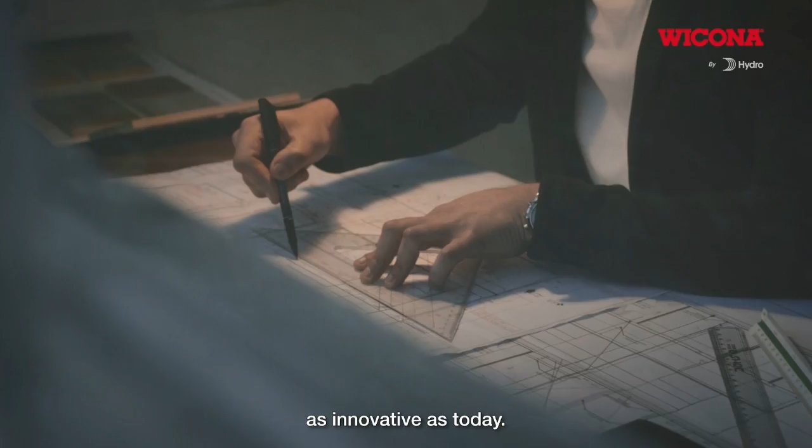Today, some of you will contribute to change the world. Outside, the world seems to stand still. Inside, it has never been as innovative as today. Rethinking for a better future, because the world of tomorrow has already started. By 2050, 70% of the world population is expected to be living in cities and urban areas, increasing energy consumption and carbon emissions from buildings. Our sector represents 39% of global energy-related carbon emissions, which is why investments in new buildings will have a huge impact on life quality and climate change.

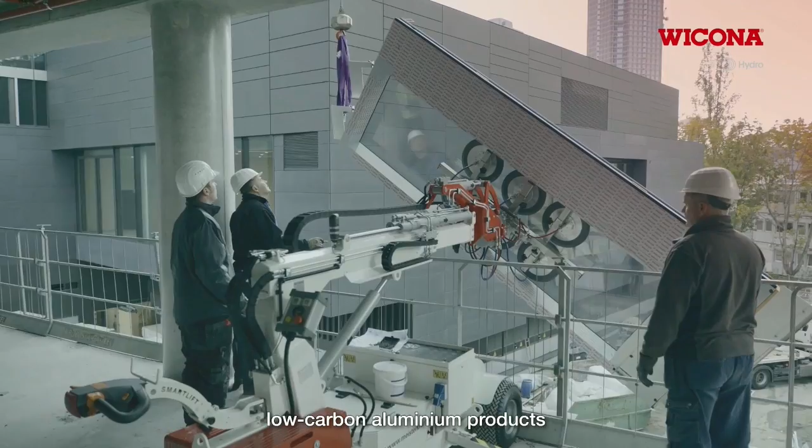Drawing on our 70 years of experience, we are now developing circular aluminum products, which are helping reduce carbon emissions in the user phase. But we feel we need to go beyond. When looking at the life cycle of a building, you will find that the upfront emissions represent 1/3 of overall CO2 emissions. Our aim is to reduce our CO2 emissions by half by 2025. To achieve this goal, we are going beyond recycled low-carbon aluminum products and running every part of our business as sustainably as possible. It begins with the origin of the metal.

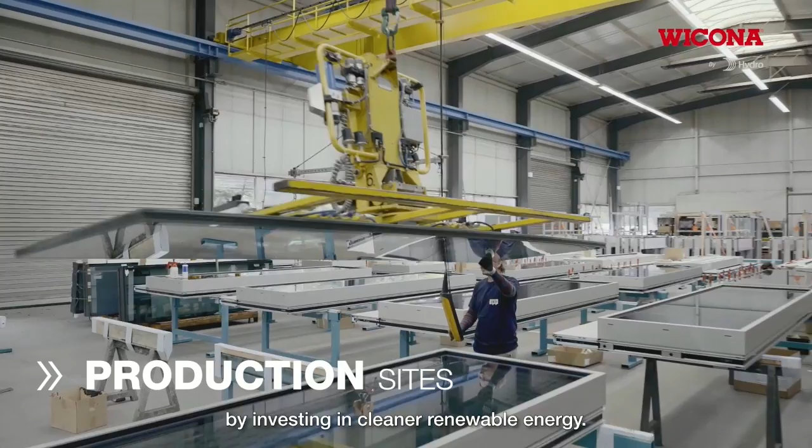We use Hydro CIRCAL aluminum, which has among the lowest carbon emissions in the world. We also go beyond aluminum by working with suppliers of recycled components who share the same values. We are continuously reducing and optimizing energy consumption at our production sites by investing in cleaner, renewable energy. And we're using less packaging materials and delivering in better ways. In the end, it all starts with us. Sustainability flows through every decision we make, every action we take. But let's see the broader picture. We are going beyond ourselves to make a bigger difference. As a part of Hydro, we commit to empower 500,000 people with education by the end of 2030. We are all in this together. We know we can make a difference because we care about building a better future.

Beyond tomorrow. Hydro is pioneering sustainability approach. In the heart of sustainability is our innovation and technology. I kindly asked Joris to tell us a little bit about our strategy and our going forward. Please.

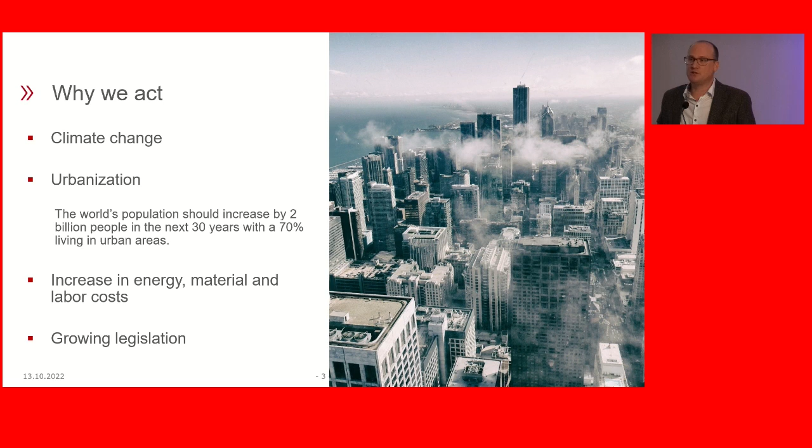And of course, we still have people that say, okay, it's not really my problem. I'm not so worried at the moment. Let me just do what I do best. But guys, we have to be honest. It's not something that is voluntary anymore. We are now in a situation where also governments are really imposing new regulations, new legislations moving forward. So it will not be a choice, it will really be part of our daily life in the coming years.

So as a good example, we see now from the European Green Deal that the first legislations have been set up on an international scale, but also on a national scale. So you see that some countries are already going faster than others in Europe. And we are really seeing that legislation will drive the future way that we have to do our construction. So we want to stay on top of that. We want to stay ahead of that to be ready for the construction of the future.

Especially because 39% of all energy-related emissions are related to buildings. So if you look at all the actions that we can take as a society, 39% of that is linked to buildings, which means, of course, it's an easy target. Buildings will really be a focus point for all the legislation. When you are talking about new buildings, there will be more severe regulations.

When you talk about renovation, we know that there will be a huge amount of renovation to be done because we still see countries where we are still using single glass or where we are using systems which are really not performing. So in the coming decade, let's say, we will see a huge shift driven by legislation to move to more performing solutions.

Luckily, we see in our business that more and more partners in the construction world are aware of this trend, about this evolution. So we are now talking to big developers, to big contracting companies, to big architect firms, in order to investigate, to analyze, to understand where we can make the biggest efforts in order to reduce the impact of buildings. And that's really a very interesting journey that we started already several years ago. But it will be part of our life in the future. It will be part of your life in the future.

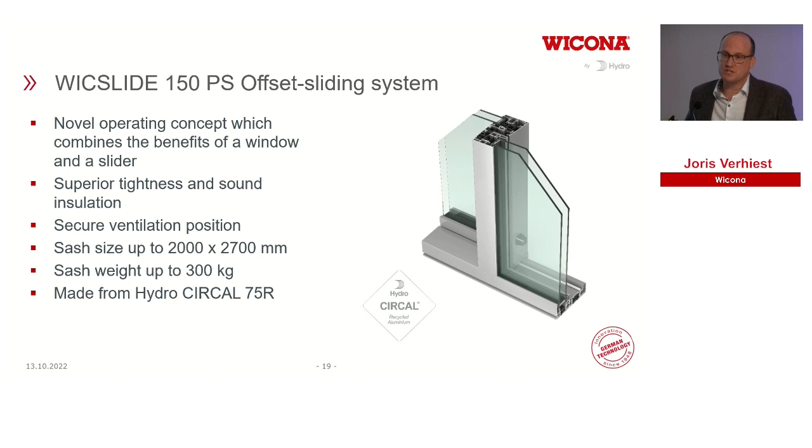Good. Then a third trend that we see in the world, and that's really a more complex trend, is everything related to energy control of a building. And then you are talking about how to handle ventilation, because we want to keep the building envelope closed, but at the same time you need natural ventilation for the people living and working inside the buildings.

You are talking about solar shading. We are doing a lot of research on what is the best solar shading solution for each type of building. But it's a really complex mix, and you see that in the building envelope, these combinations between ventilation, solar shading, building automation, and night cooling principles are getting more and more complex. But we are making solutions for that.

And one solution that is really getting a prominent position is what we call modular construction. I was talking in the introduction about the fact that the material cost is going up, the labor cost is going up. It means that the traditional way of making buildings is getting more and more difficult, because we go more and more to an industrialized, modular type of fabrication. And that's where you get concepts like unitized facades more and more.

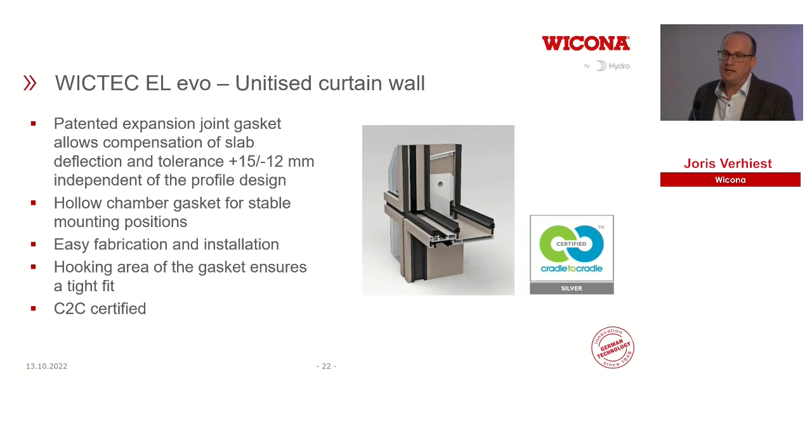Unitized facades are really about the full building envelope of any type of building, which can be adapted in functionality, but also in material choice, where we can keep the core of the building. For instance, after 40 years, we can take out the envelope of the building, keep the core, but put an entirely new envelope around it, which gives the building owner the opportunity to decide which type of building do I want.

Do I transform my building from office to residential, or from residential to another type of application, or you can even change story by story. So modular concepts in the future will offer a lot of flexibility without each time having to demolish buildings entirely.

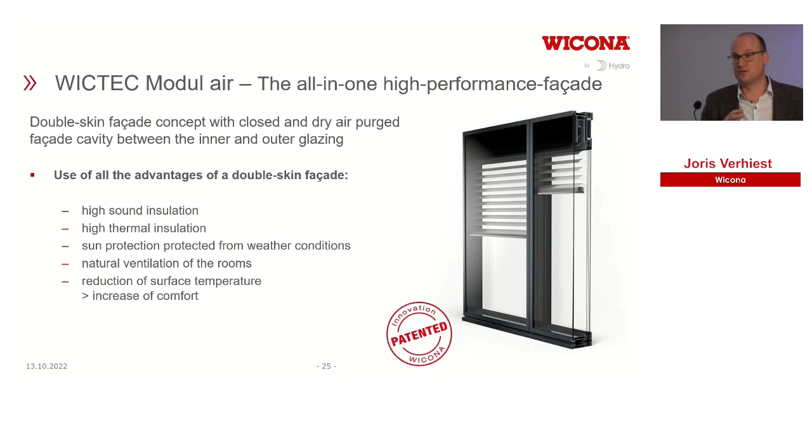So the conclusion, or let's say the first conclusion for me, is that all of us in the construction world, we are going to more and more complex design of buildings, but sustainability is really getting a more prominent place when we have to make choices in which type of applications we will take.

Why is this even more important? Because what we have seen till now is that the systems are getting more and more performing, the systems are getting more and more adapted to the future needs to reduce the use stage of a building. But the second step is that we are actually looking now at upfront emissions.

And what do I mean with upfront emissions? Then we have to have a look again at the life cycle of a building. We are talking about the construction process, because in a lot of cases at the moment, we are not considering the upfront emissions in the decisions for our buildings.

When you are working on a project, do you really know where the materials are coming from? Do you really know if the systems, the materials you are using, are really good? Are they not hazardous? Are they really able to be recycled? There's a lot of lack of knowledge there. And that's where we really need to focus on as a full building industry, because in the future we will have to make choices from a sustainability perspective to know which are really the materials of the future.

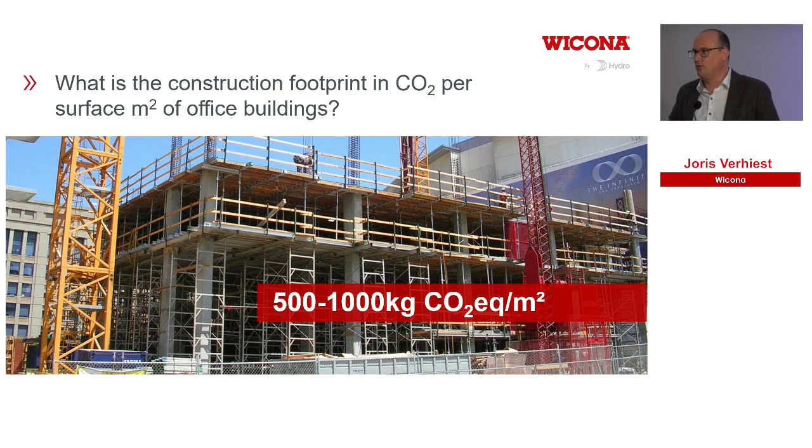So if we have a look at a typical window, and we look at the weight of a window, of course, it's clear that the biggest weight is related to the glass. The glass in a window is the heaviest component. But now we have to think differently. We have to start thinking in life cycle assessment. We have to start thinking in environmental impact of materials.

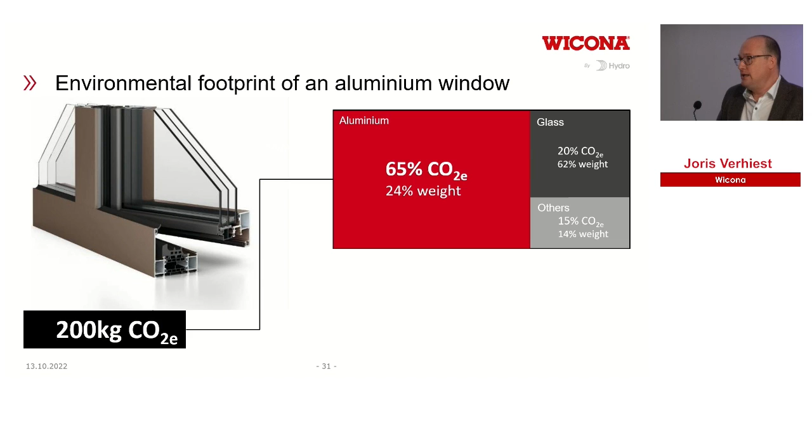And then you will see for an aluminium window that the impact from an environmental perspective on global warming potential of the aluminium is 65% for a standard average window in aluminium that we are selling in Europe. So this has quite a big impact, the aluminium.

What we also have to start thinking and reflecting about is what do we do with this window after 40 years? And we need to consider these types of calculations also in the future, because I will come back to that. For instance, aluminium compared to PVC or wood or any other material has a very big advantage that you can recycle it infinitely without quality loss. So in the future, when we are making choices for a material on a construction, we need to make the right choices. And that's the type of exercises you will also do more and more in the future.

So the big question is, where are we with the aluminium? And this is really something you need to be aware of, because depending on where the aluminium has been produced, the footprint of the aluminium can be very negative or can be very positive. For instance, we see that still a lot of aluminium is being produced from alumina with a lot of energy in countries like China, the US, Australia, and so on, using coal, which is very polluting from an emission perspective. We also see still a lot of gas being used, mainly in the Middle East.

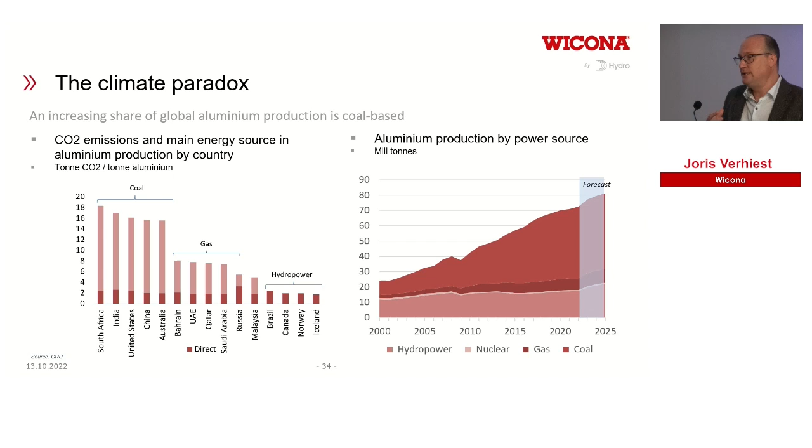But we also see that there are new technologies nowadays which are really focusing on renewable energy in order to make aluminium and to reduce the footprint. So in the future, it is really important when we have debates that we understand where our aluminium is coming from. But not only the aluminium, we need to know about all materials. Are they really hazardous for the environment or not? So that's where Wicona has been a pioneer.

We have really created a kind of revolution. I'm very proud about this revolution, because 4 years ago, all of a sudden, we decided strategically to change all of the aluminium that we are using in Wicona from a standard primary alloy to an alloy called Reduxa, based on renewable energy, actually based on hydropower.

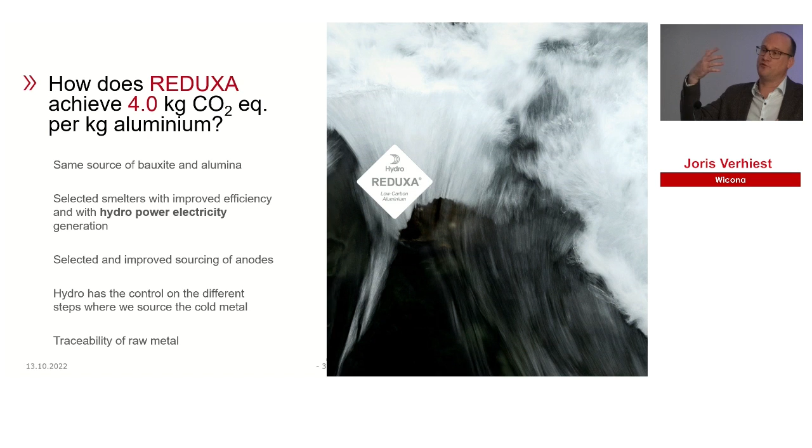So 4 years ago, we really took all of the primary aluminium out, and we only started using renewable-based aluminium alloys, which meant that in the Wicona offer, we reduced our footprint on the aluminium part by almost half. But this was only the beginning, and that's really the revolution, and we are really ahead of our market, I must say. Because nowadays, in the Wicona world, we are using another alloy which is called Hydro CIRCAL 75R.

That's also where we in the aluminium world are convinced that aluminium for windows, doors, facades, sliders will remain a material of the future, because we know that there is a huge amount of aluminium still available. We know that recycling aluminium is very interesting from an energy perspective. You only need 5% of the energy compared to primary aluminium. And we also know that altogether in the construction world we can go to very high recycling rates.

Because if you are looking at beverage cans, for instance, in some countries more than 90% is recycled. In the car industry, we also see huge recycling rates. We are convinced in the construction world we will go to very high recycling rates.

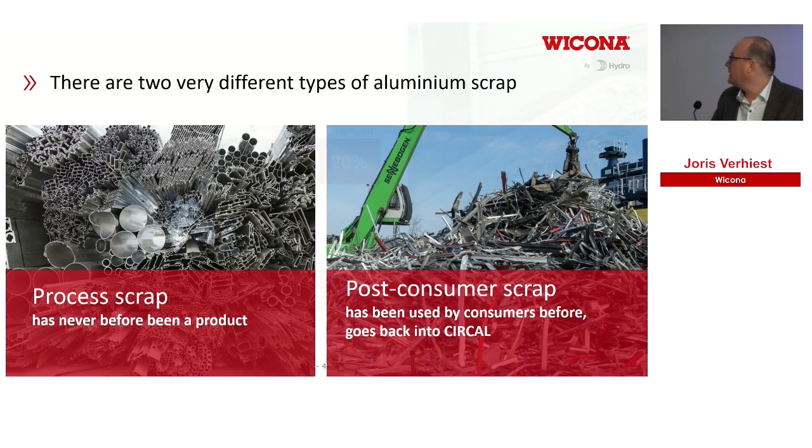What is also important to understand is the difference between post-consumer and process scrap. We are actually using post-consumer scrap, which means that we are really using windows that have already been used in our products. We are not talking about process scrap. Process scrap is something you get automatically from the extrusion process. We are really taking back old windows, old doors, old sliders, and recycling them into what we are currently selling. So quite an interesting process, which we have in-house in the Hydro facilities.

We are now doing this type of recycling in several plants across Europe, and now we also moved into the US. We are quite a specialist within the Hydro Group on everything about alloys, and we have been doing thorough testing, so we know that if we recycle in our processes, we can give you the same quality as a primary alloy. There is no degradation of quality. That's very important to understand. Simply because aluminium is a beautiful material, you can recycle it 100 times without any quality loss. And this we know how to do quite well in our facilities.

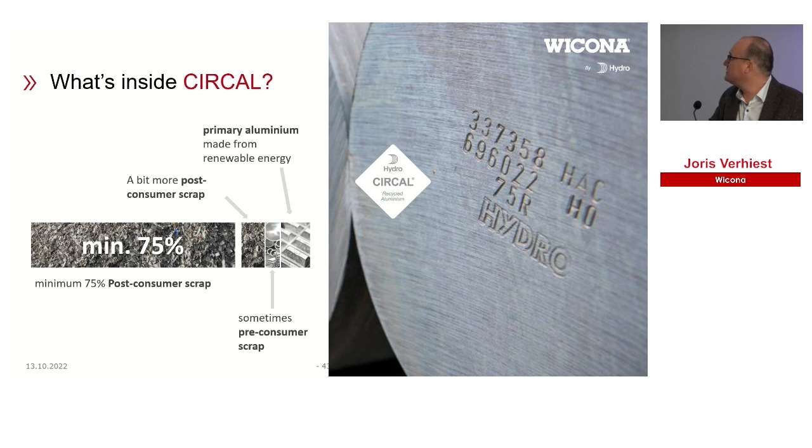So what does this bring us? This is probably one of the most important slides of my presentation. With the current offer of Wicona, we are offering CIRCAL alloys, which means we have a footprint of 2.3 kilos of CO2 equivalent for 1 kilogram of aluminium, whereas on average in Europe we are still at 8.6. So that's quite a big revolution, and that's unique in the offer, and we are very proud of that.

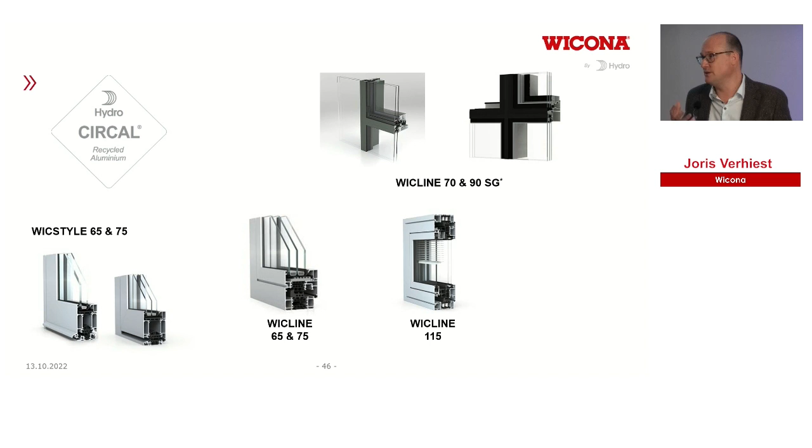In the last years, since we started implementing the CIRCAL alloy, I think we have already covered more than 300 projects worldwide. We went one step further. We also decided everything which we have in our warehouses is now offered in CIRCAL alloys. So whether it's one bar, one window, or one project, all of these materials are produced using CIRCAL. So at this moment, if you are working with a Wicona product, you know that from an environmental product perspective, from a global warming perspective, you are really using the most sustainable aluminium solution currently available in the market.

So, what is the second topic? It's actually not only aluminium. If you look at this cross-section of one of our window systems, you see that the synthetic material elements are also very important. Because we are continuously increasing our thermal performance, our systems are getting bigger, the synthetic part is getting bigger, and there too we have really made a revolution, because we started using recycled polyamides.

We are taking back scrap from the car industry, recycling it, and using it in our future windows. So not only is the aluminium giving us a lower footprint, the synthetic components are too. And then we have to go a step further, because this is something new.

This is the new Wictec EL60 facade. What we have done, quite revolutionary, is look at the full facade, and we are now looking at all components: aluminium, synthetic materials, corner cleats based on Zamak, screws based on stainless steel, and so on. All of these components we have transferred to using recycled content. At this moment, this facade is based on 75% recycled content.

We are using CIRCAL old windows for the aluminium. We are using rPET, which are plastic bottles, for the thermal insulation. We are really trying to move everything to recycled content. We are not waiting 40 years to recycle. We already use it now, which means we reduce the footprint now.

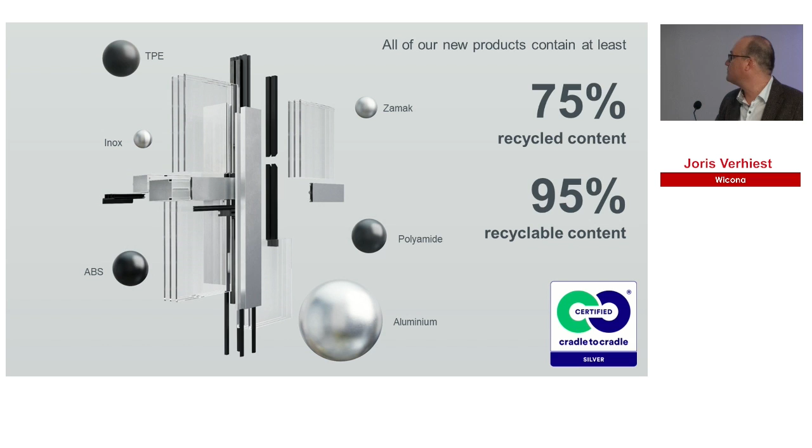In order to make everything quantifiable and measurable, we have also been working very hard on our Wictop software. In the Wictop software nowadays, we are able to generate EPD documents. For some of you, EPDs, environmental product declarations, may be something new, but this is something you will be asked for more and more in the future.

With an EPD, we actually show the footprint, the environmental impact of a certain product, by analyzing its full life cycle. Which means that in the future, when talking about a building, certain choices will have to be made between materials, and we will have to make these choices based on facts, because you will need to monitor and show the reality of the footprint of a certain material in order to make the right choices.

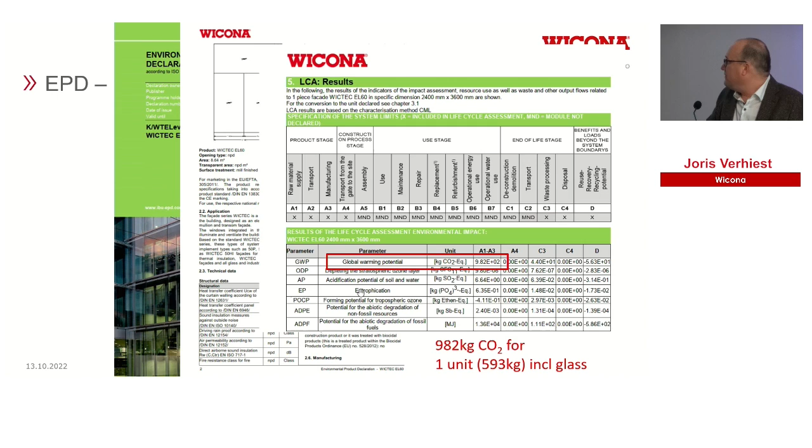So we are quite future-proof; it's done with an independent institute. Everything is checked, and we can now show you the effects of our materials in our projects.

But secondly, we are changing from primary materials into recycled aluminium, recycled PET, or other recycled materials, which means we are reducing the footprint of our systems both in material and footprint. In a simple explanation: if we compare a primary facade made somewhere in Asia, for instance based on coal, to one made based on recycled content, we are reducing the footprint of a facade by a factor of 10. That's really huge, and that's the type of exercise we will have to do more and more, altogether.

So there's a lot of greenwashing going on. What we try to do is use independent audits and independent certification to prove what we are saying, that it's really not greenwashing but facts. We have a lot of official documents to back that up.

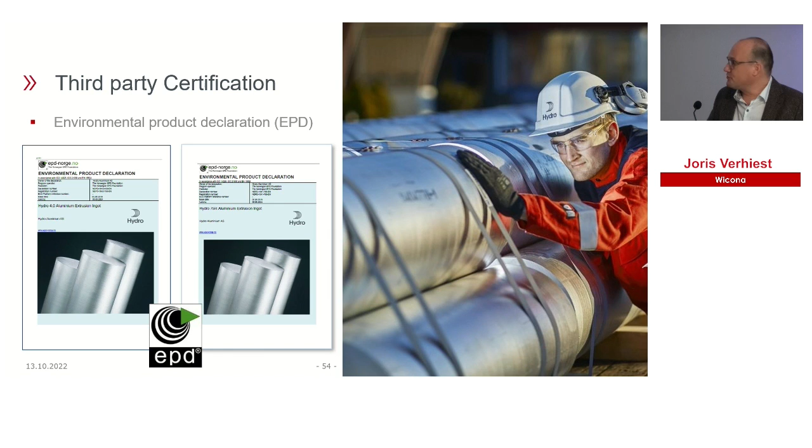We are working a lot on certification, also for cradle to cradle, because we also need to help support green building rating schemes. We are also part of ASI sourcing. What does this mean? Probably you know FSC wood, which is the wood alternative. We want to be certain that the aluminium getting into our system is produced in a corporate, social, and governance-responsible way, with respect for people and wildlife. That's what we do with ASI certification.

So quite a complete picture. And that's actually what I wanted to talk about, the first pillar, which is the products. We talked about a lot of topics, so I will quickly move to the next pillar, because what I've been talking about this morning till now is really what we are bringing to our products, what we are bringing to you as a product, what we are bringing to the construction world from a product perspective.

I've been talking about performance levels, about use stage performance increases, about the first phases, the material choice. All of this brings a benefit to the product. But secondly, and that's the new dimension we need to talk about, we also need to think about how we, as Hydro, as Wicona, can reduce our footprint. Everything we can do as a company to reduce the footprint has an impact, directly or indirectly, on the footprint of the product. That's another challenge, because there too we need to think differently about how we operate our daily businesses. There's a lot of elements here in the company pillar.

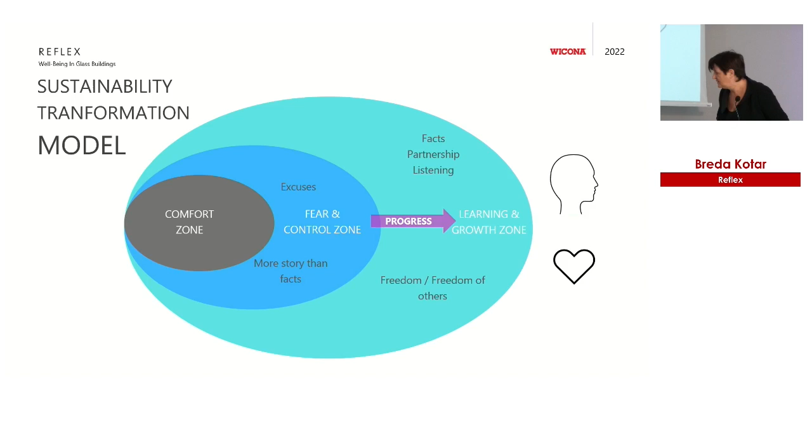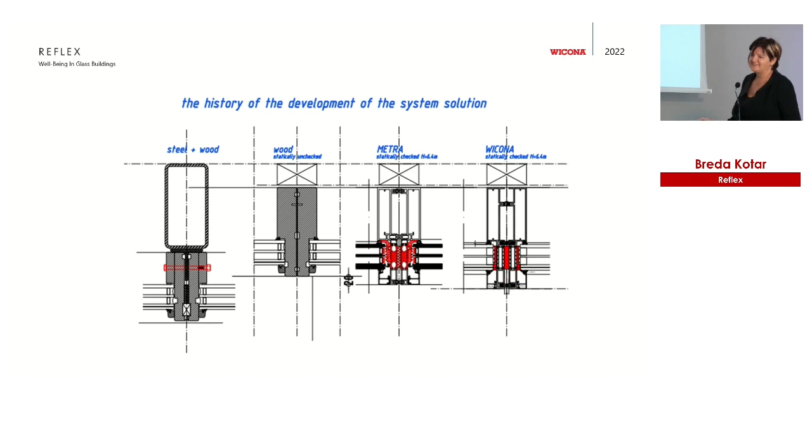And the product Hydro 75 was chosen. 75 is going back to the process. And so we studied this process from Wicona about the sustainability, about how to bring the material and the waste again into the process and to make an excellent product.

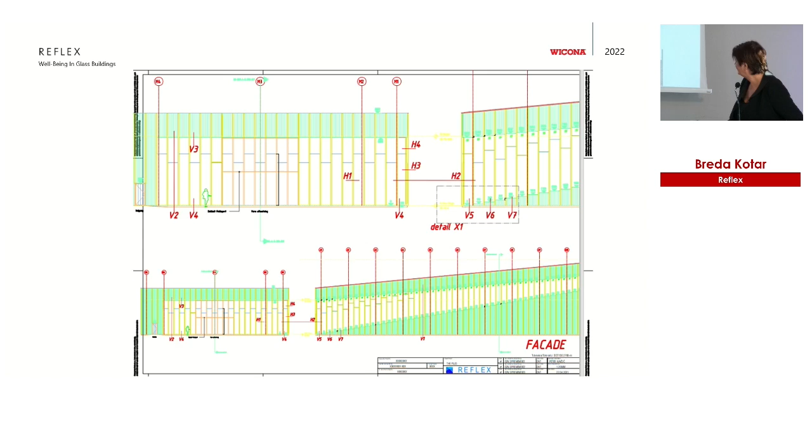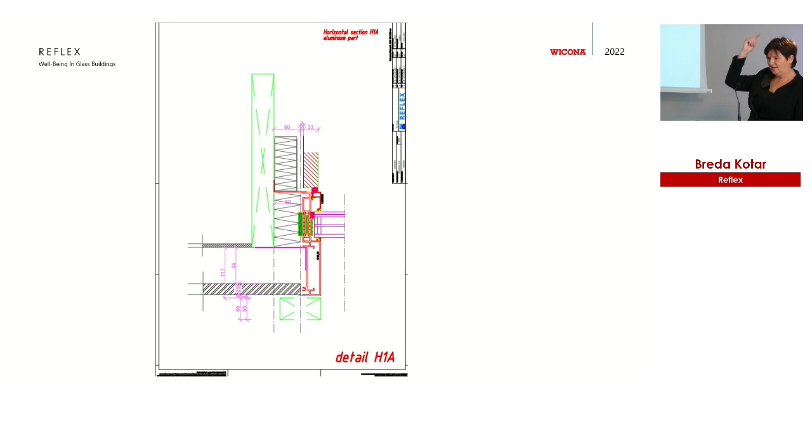This is how we addressed the anchoring in the wood, which was another topic. Here are the facades; each glass which left the company was a different one. This was a challenge for the production as well. And then we put additional beams into the vertical of the building. What was still interesting is that the architects decided in this rounded building not to use any vertical supports. We needed to bring everything up on the horizontal part of the circle.

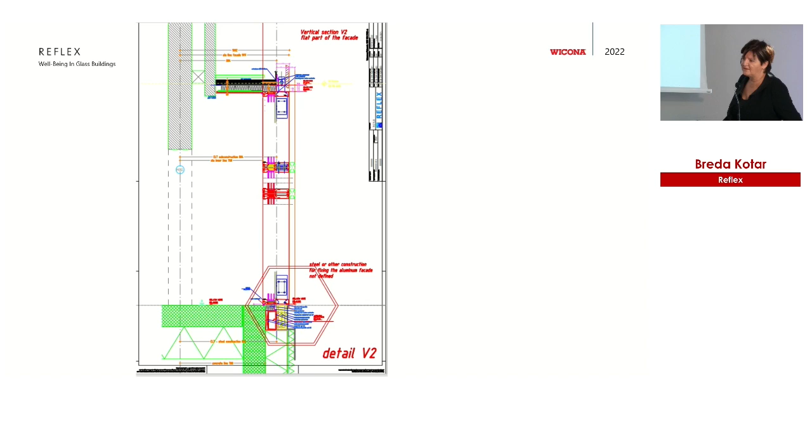I have so many details here, I will not bore you with them unless some question appears, but our engineers really studied this for 3 months, day and night. The WICONA team from Croatia was very, very supportive. Without them we couldn't do this, but our engineer, Mr. Petar Kaučić, is really an expert at bringing impossible wishes into possible ones, achievable in production. So here is also this sectional anchoring. So I will skip this and go to the pictures.

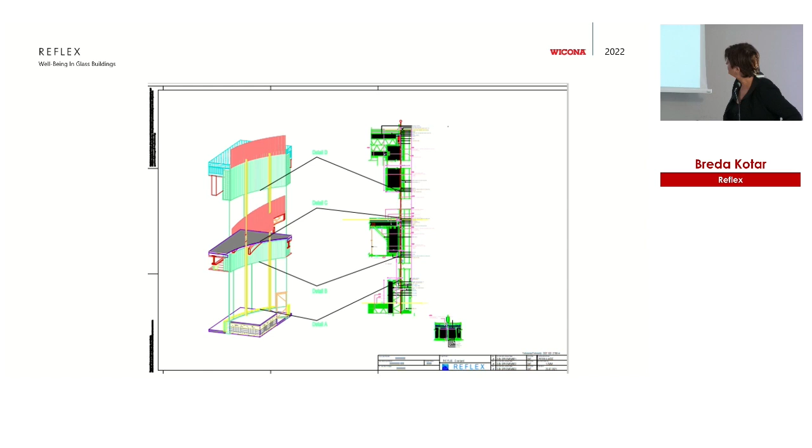And the question is, what is inside? Inside is the production of furniture, on 7,000 square meters, and on the top they have photovoltaics. The building really achieved BREEAM Excellent, and they were awarded in London with an architecture award. As well, another building: we have two buildings in this competition. One is this in Croatia, and another one is that one from BIG architects.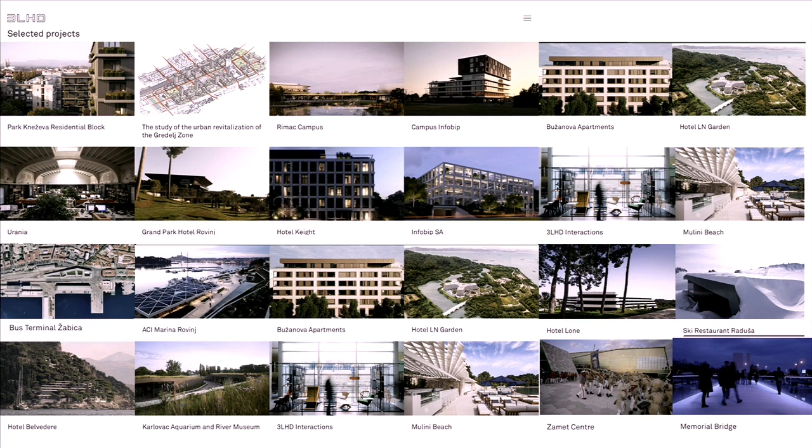What is important also to say, during these 28 years, we did a lot of projects, over 350, mainly in Croatia, but some of them also abroad. All the projects are different typologies. We did everything, actually, in any typology. Nuclear power plant, as Zoran said, and churches, yes, we didn't do a church. In the last 15 or 18 years we had a lot of projects in hospitality, which everybody says is logical because you are from Croatia. Croatia is a tourist country.

Those projects were different. As Ranka already mentioned, we are kind of an integrative office, iterative office, because we involve a lot of people. We are a collaborative office. The people are developing through our knowledge, which is based on projects of different kinds. And our knowledge, we are gaining it through working, building, designing the ideas. Those are some projects. I'm not going to go into them, but just for you to see some of them. This one, for example, is prefabricated.

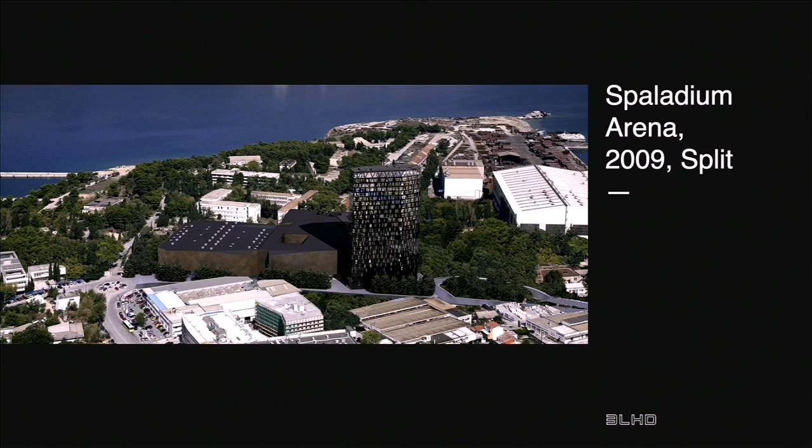Because we are in Split, I have to mention also Riva. This was a very interesting public project, Split's living room, done now 15 years ago, where we redesigned the whole elements and facilities there with the landscape, urban design, lighting, and so on. We also did in Split part of the Spaladium Center complex. We did the Spaladium Arena, which was done for the World Championship in handball.

Those years were interesting because there was so much of the hotel industry or hospitality. We did a lot of public projects. We did a lot of sports halls, from small to big, or I would call them civic halls, because most of the project is a sports hall, but it is also a community center. This was actually our first project.

Maybe it's a prophecy, but we did a hotel first and then came back 10 years later. Hotel Lone was the project which actually moved us to hospitality. It was the first project of that kind. It was part of Design Hotels. It's not a brand, it's a chain, now part of Marriott. It's in the beautiful city of Rovinj, and we have to praise our client, with whom we have been together for almost 15 years, because they believe in us. This was a very important project for us, and it led us to some other projects.

When I see the year 2013, it's always a long term for architecture. This was a project where we won the competition in Zurich, which is very interesting. We are part of the team with Miller Peter Architekten. It also led us to do a project in China. A client in China approached us and said, "We want Lone." So we said, okay, we'll do a clone. It's double the size. It's different. It's not 3 wings, it's 4 wings and so on. It was a fantastic experience in South China, Guangzhou. Double the size of Lone, and of course different in some areas.

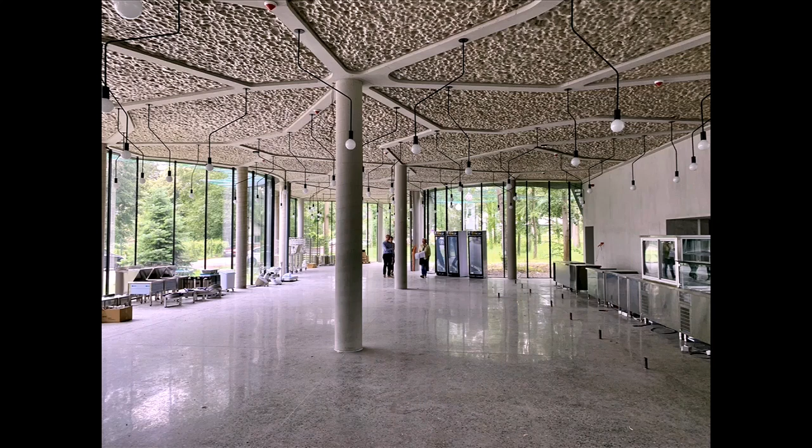I don't know what's happening. And the roof should be not only green. I'm also teaching at the university, and with the students we did a pair of completely wooden modular pavilions, which were actually apartments for the guest professors. We provided the installation and the foundation, so the wooden pavilion will just be brought to the site. For example, we experimented with the cast form for the concrete to achieve acoustics, which is not enough, of course, but we achieved really much. As I said, those public projects have pretty limited budgets.

Another project which we finished recently is also in the city of Rovinj, which I mentioned, and it's part of those hotels. It's a hotel park, which is very simple in concept. It's a terrace park, leaning on a beautiful forest of 100-year-old pine trees. Not only a forest, it's a huge park. The trees were planted 100 years ago. It was part of the former hotel, neglected and in a bit of bad shape. So we did this.

We call it a tribune to the view. Every room has its own terrace and Mediterranean garden, 10,000 square meters of Mediterranean garden. We preserved those trees, and everything you look at is this beautiful city of Rovinj and Katarina Island. Every room not only has green, some of them have private pools, which is important for the image. Just one note here about the size of the glass: we have one glass panel of 15 by 3.8 meters on an event hall. So it was built.

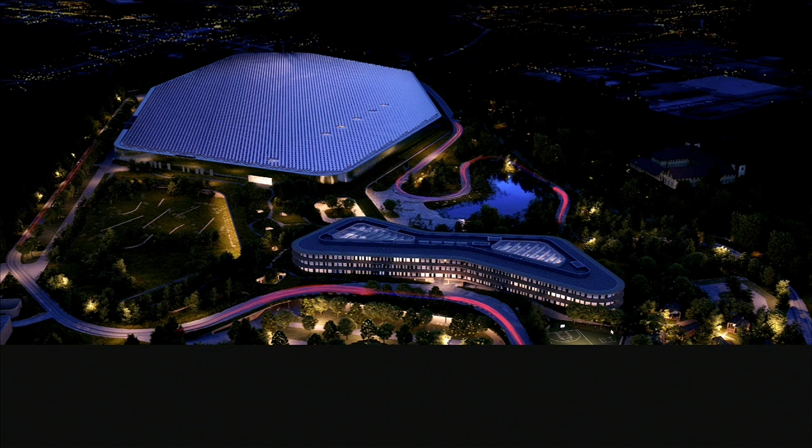I think it was made by Sedak. Yes, from Sedak, Germany. And one of the biggest projects that we have been doing for almost 3 years now is Rimac Technology Park, which is a really big project. Three quarters of it is this huge production hall.

It was an international competition. Rimac is an expanding company, one of the biggest companies of this size in the area. Part of the area is an old castle, and we built it with a view, with a cutting view through this. We sunk the connecting building, with the connection between the factory building, headquarters, restaurant, and artificial lake.

We have modular houses, wooden houses, a kindergarten, and so on, and one racetrack built to F1 standards, which is another story. Of course, I'm not going to talk about this project, which could take a long time. This project tries to be fully sustainable, with every possible energy value added to its core.

I'm finishing this part with our space. As I said, I think the most sustainable thing is not to build, which is, of course, kind of strange to say as an architect, but not to build in the sense that we should use existing buildings. Reuse is an area which we are also doing so much, and I'm also teaching that in school.

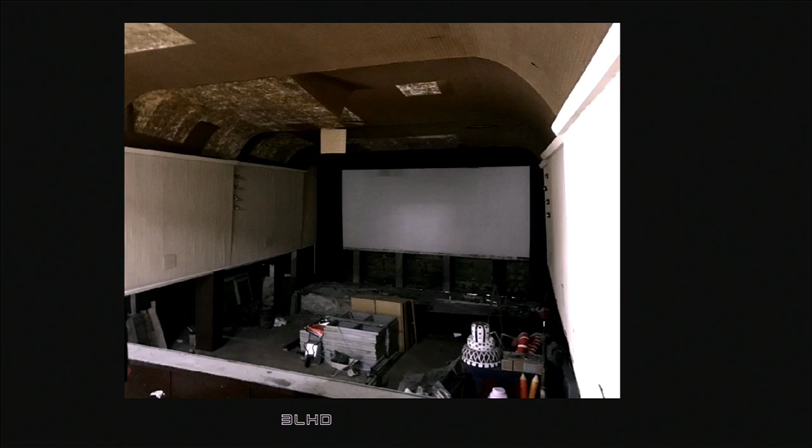And this one was neglected after, of course, the Cinemaplex came in. This is how we found it, and it was a classical cinema, one of the biggest in Zagreb. What we found was pretty fantastic: longitudinal concrete ribs, which was one of the first concrete structures done. These arches and every ceiling in the building were done that way, which was kind of interesting for us.

We considered, of course, demolishing it, but when we saw the potential, the only thing we needed to do was to provide light into it. We cut some elements, we preserved a lot of it, we stiffened a lot of elements, and those two pictures are the existing place, then the project and the execution.

There is an interesting foyer, I would call it, in the middle of these 3 volumes, which we use as an important public space. In the longitudinal section, we just increased the balcony and provided 2 spaces: one is the studio space, and the other one is a meeting space. They are very high, with ceilings of 4 and 5.5 meters. This is the intermediate space of the foyer. These 2 floors are extra offices, and this is a snack bar and cafe, which is also part of our project.

These are just the photos. We did studies of the light with Transsolar, a German company, because as you know, cinemas don't have light, so we provided lighting from above and from 2 sides, and these are the images. As I said, this is the multifunctional space in the middle of the house, which we use as a meeting space and so on. And this is the latest photo of the office.

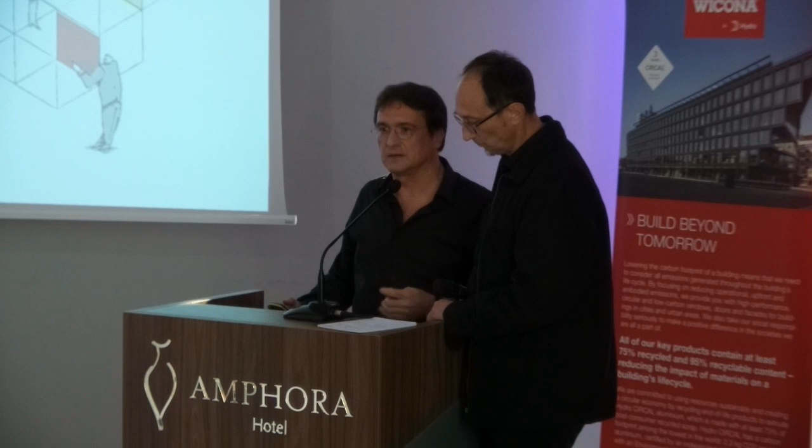Just an addition, before we show the projects and these 2 case studies, is something which we think is also really sustainable: a digital platform called Volume. It's not Volume 3, it's Volume, but everybody's calling it Volume 3. Zoran will talk a little more, but what is important is that it's something we have been doing for 18 years now, developing from an Excel sheet to the digital platform.

I will be very short. As Mr. Joris mentioned, this is a way of reducing the environmental impact in the design process as well. We didn't invent it, but we tried to make a platform for data exchange, for paperless work in a digital environment.

So it was developing for like 4 years, but before that we already started with the specifications and everything which can be done electronically to reduce the paperwork and printing. So it grew up a little, and then it grew up big. It started with just exchanging drawings, but now we are preparing other modules.

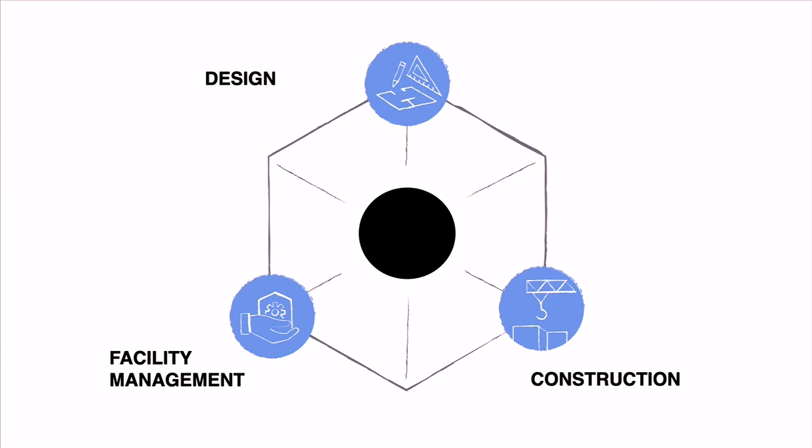But obviously, what's more important is to bring the project management inside, the bill of quantities, and that module which started 10 years ago for the specification of the products is now becoming a huge database for all the products of all projects we used, and even open to whoever wants to use it, to try to make the whole process really straightforward, without complicating it.

But when the whole process started, it was the email. Now it's the worst, because the email is becoming spam. We are losing concentration, and searching for the data in the emails begins to be really confusing. So the platform is something that we are hoping will first help us, but also our contractors and all of our consultants to be more predictable.

And maybe just to add, I'm not selling it yet, but afterwards we can talk. It seems always when we are talking about this that we are selling it, but we already have a company inside our company, which is just research and development for it.

Yeah, and what is interesting, maybe one slide before said, you always have different kinds of accounts for Google, for this, for that. This is everything in one place. This is something which we try to integrate, like we are doing in our business. It's developed from our need, to make it better, not only paperless, but of course this is also one thing.

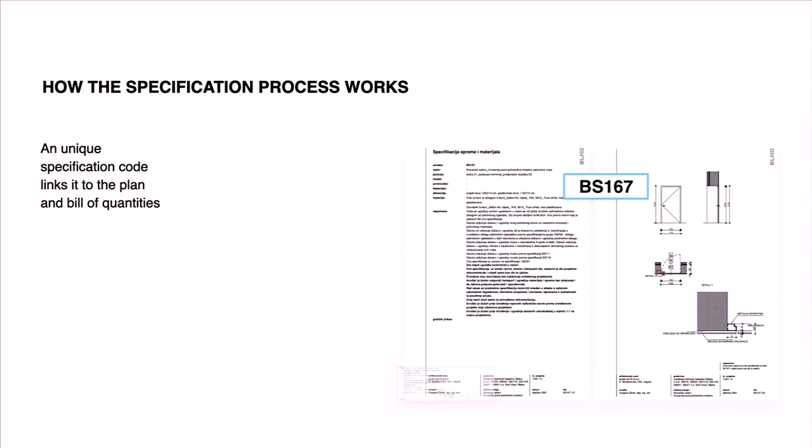And our bill of quantities is like this, and specifications are like that. And of course contractors don't like that, because everything is specified and everything is reachable. It's very simple, because a lot of projects which we've done lately were done like this, and the process is very important, very simple. You tag it, of course, but also everything is available.

The last 3 projects, including the one that I will show you afterwards as a case study, were done with the contractors with iPads on the building site, and we were talking through the iPads, not with a lot of plans, zooming in, zooming out. And that's of course developing. As Zoran said, we are developing other modules which are missing, and this is the development area.

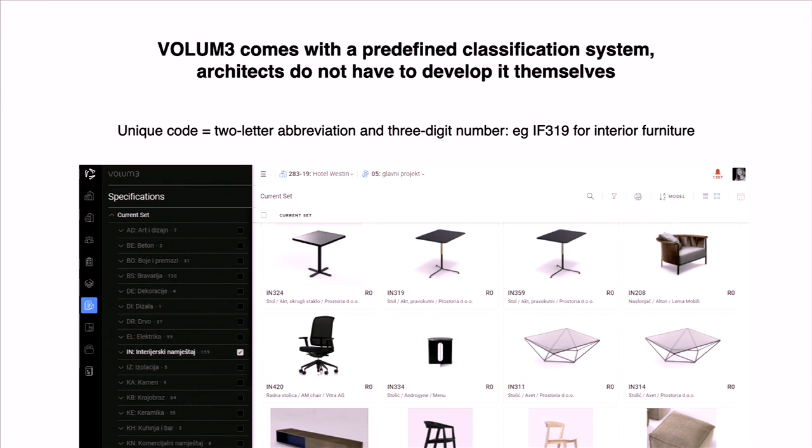Everybody says, why don't you develop it as an application? We are saying yes, we are doing it as an application, but it's a slow process because it came from our experience. As Zoran said, we are not going to sell it, but this is an important part of our development as a company.

This is most important: the searchable, the tagging, all the attributes you can put to one of the products. And when it's in the base, it's available to everybody in a project. It started growing when we were putting all the specifications, all the products from our projects inside, but now it grew more than that. I forgot that we have this small demo of how it works, and it's really simple. It's all in one place, one touch print, PDF, everything is in place.

Marco, I forgot the numbers for the InfoBip headquarters. Some 1,000 plans on the platform, so everything is available, not only plans but specifications. And we used to show in a presentation of the software the comparison with the paper we made for the hotel park, and how much space it used. This is important from 4 sides, or even more. But what is important for us is that it is not only time saving but also adapted to the user.

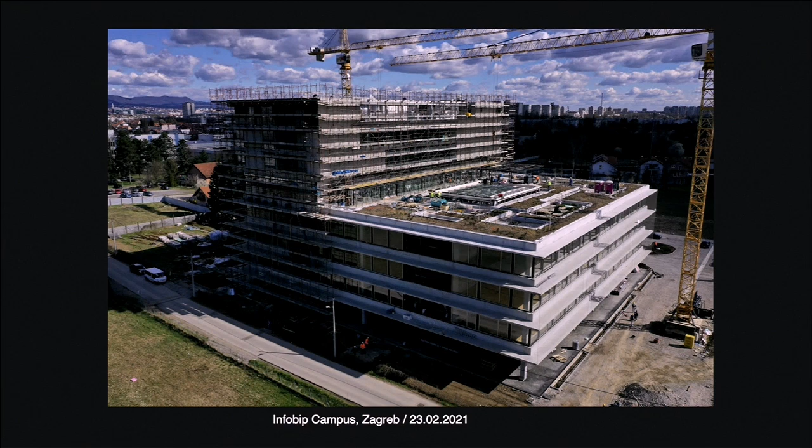This is the last project that we finished. It's a big company. InfoBip is an IT company, I think the first Croatian unicorn. Listed in the States. And conceptually this building is what we are doing. It's a large office building of middle size,

with an atrium. It has a green facade, actually a net, which is growing in front of the glazed walls, and the main public square is actually on the 3rd floor, with a kitchen and everything, and this is the accommodation unit. Okay, we have to hurry, sorry.

So we'll show you 2 projects, the residential block Bužanova in Zagreb, and also Park Kneževa in Zagreb. Both are in the Zagreb urban fabric. I'm showing Bužanova because it's a predecessor, gaining knowledge from this project for the last one which we did. The client VMD is probably the most conscious developer of housing units in Croatia, and in Zagreb definitely.

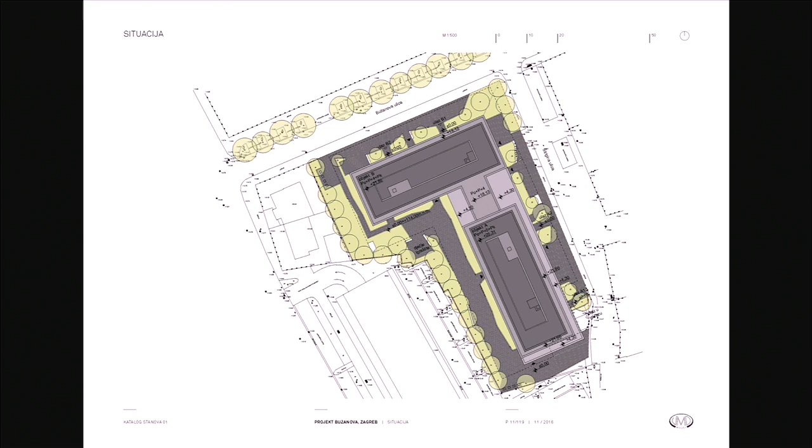What we did actually was we were thinking with them about how to make it efficient. So we did a structural frame with 2 cores, which in Zagreb, unfortunately not like in Norway, is an earthquake zone of 9. So it's really difficult, and when people are asking why do you have so big columns, it's because we had an earthquake and it proved it needs to be like this.

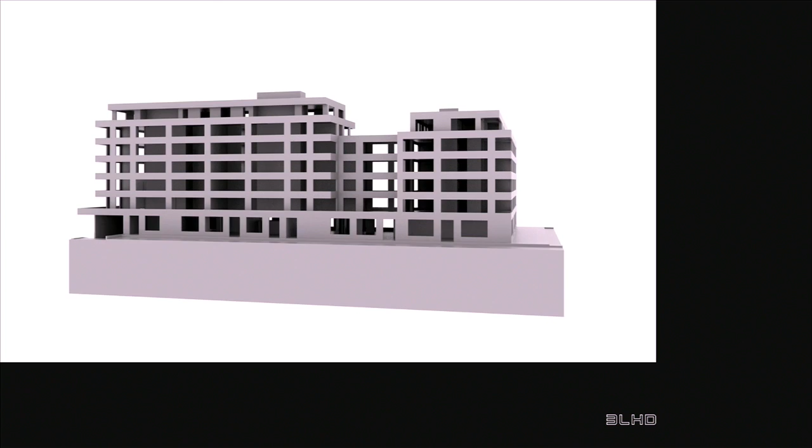So the idea was to make a structural frame with as much as possible wide windows or frames, and we developed a system of windows which actually contains even 3 rooms as part of this system. What we did, was of course prefabrication.

As I said, we have a low parapet. So 1 room, for example, has this 2-meter window. The other one has a hatch window and a fixed element, or in some places we also have a balcony. What is important, which we developed here and used afterwards and improved on Park Kneževa, is all the elements that the client wanted.

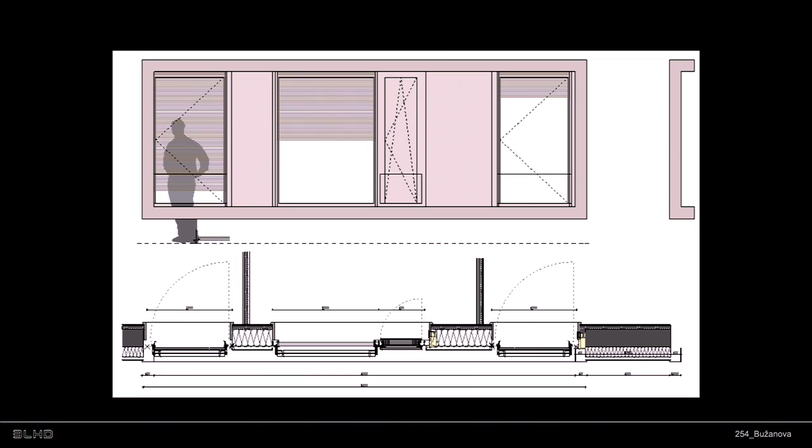That's of course a normal window with opening aluminum. This was actually aluminum wood. Then we have Venetian blinds, mosquito net, and also we introduce small air recuperation units. It's not heating, it's not air conditioning.

So this is something which is very interesting. We actually improvised a little bit here with the profiles, how to get air from inside and outside. It's really efficient, a small unit, simple, I would say primitive, but it helps - you don't need to use air conditioning as much as needed. So we developed this window, which was very important, because when you do prefabrication of the panel windows, speed for the building becomes really important.

From inside, this looks like this. So it's a picture window with this hatch. We would probably do it differently now with this experience, but the idea was to have this kind of picture window. One fixed, and the other one opens. Maybe next time we'll do it with glass that expands.

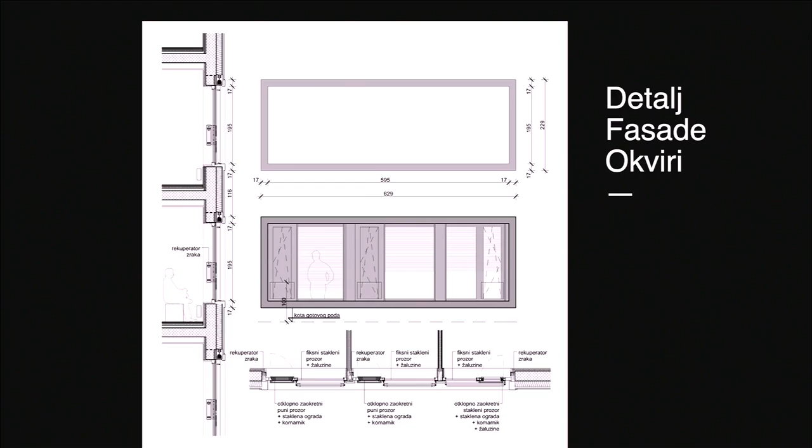For example, for Infobip we did a smaller one. So this is some from the production, and the result was this. It's just two elements - we actually very rarely just did the plaster facade, we're always doing a ventilated facade. This was also ceramic like the other projects. We introduced just 2 simple elements: aluminum cladding, windows, and the ceramics.

Okay, pretty pictures. The client has a really interesting standard, actually. Every room is a little bit bigger than in a standard building now built in Zagreb. Obligatory loggia, walk-in closets in the rooms, at least 2 or 3 bathrooms, which is probably the highest possible standard you can achieve in the housing industry.

The other thing we moved and persuaded the client on is a lobby. He lived in the States and abroad, and he understands that. What we did, actually, for the 4 lobbies, we introduced something in those positions - a small living space with art and a rest area, and it looks like this.

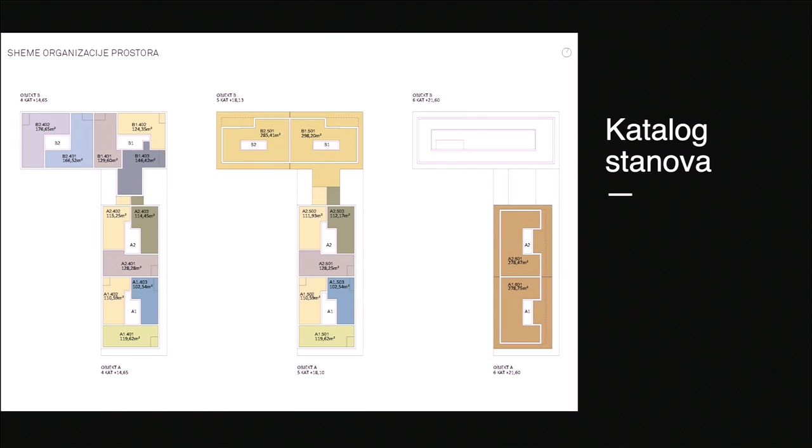I'm going to hurry. The catalog of flats ranges from 70 to 150 square meters, and some apartments are a little bigger. These were renders because we actually didn't have almost any flat that we designed built yet.

What is also important is that those flats were mainly, at least, double-sided, cross-ventilated, which is of course very important. And those are some images from that.

And we're now coming to our latest project, which is not officially open yet but is finished. Maybe too many slides, I'm sorry. Did we consume too much time? No, okay. Yeah, this is one of the flats, which is actually more...

Green areas were important, but in the next project even more so, because this is a very tight urban situation.

The last project we are going to show is a residential block in the middle of the city. As I'll show you, the main square, the main public and park area of the so-called famous horseshoe, and actually leftover area from the former factory with a very important high school from the 30s. This was the situation for, I would say, the last 20 or even 30 years.

So Zagreb blocks are something like this, this is the size of these blocks. During modernism, some blocks were either demolished or intervened with projects from those times. And this, with this corner, was part of the famous industry.

Penkala was the factory that actually invented the mechanical pencil. This area was completely... so this was the factory, as you can see, and this corner building, which was still preserved. After the war, it was still functioning as a textile industry, but during, I think, the 90s, it just collapsed.

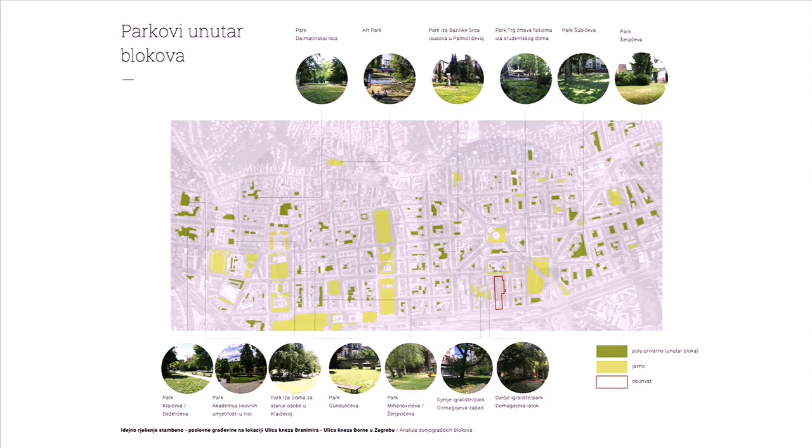Then we studied green, where the light green is public, the darker green is semi-public or mostly semi-public, and this was the area. So those two elements were among the most important. The other one was this public passage.

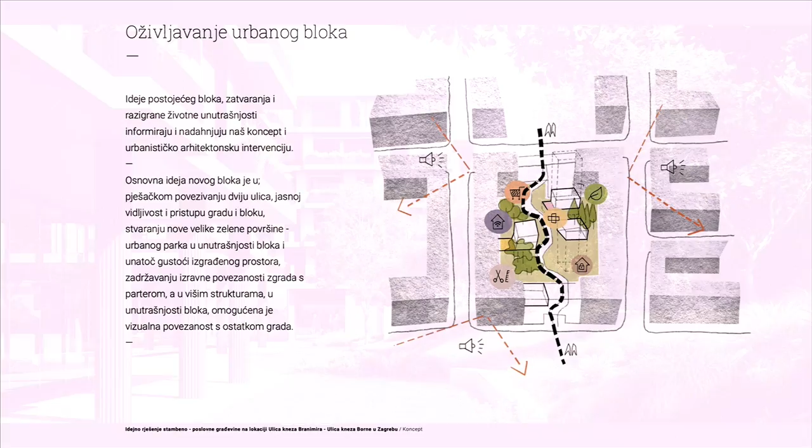We have it as many countries do, covered from the beginning of the 20th century or more recent, but we also have passages which are actually open, like a narrow street, used as public places, though some are not functioning so much. So the idea was to do the inner block with as many activities as possible, considering this concept of a pedestrian area, and to make it as green as possible, meaning introducing new plants, which is very difficult in these very narrow places, and that's what we achieved.

Also important, this was on two sides of two streets named after famous Croatian knights, queens, kings, princes, whatever, where we have buildings that are interpolations, closing the blocks, with different heights of closing the block, and then allowing a huge passage height of 4.3 meters, going into it. You'll see a little bit later.

What we studied, and what was important, is the measures of the urban block of Zagreb, which was always a case of it. So the main streets are actually only 11, 15 meters.

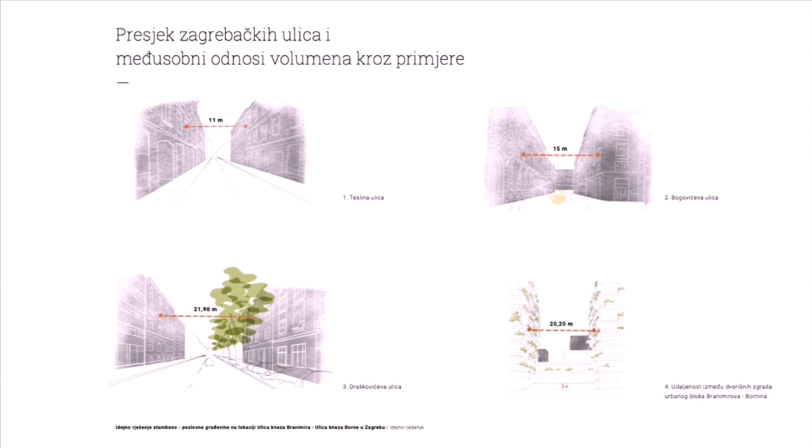The widest street is very near Draškovićeva, which is 22 meters. That was important for us because the narrowest part in our plan and design was between two, call it towers, but it's only nine flats, which is 20 meters, but we moved it a little apart. So this is the result, kind of.

These are the buildings, corner or two street buildings, and inside the porous volumes, 3 verticals, which is actually also a case of the verticals happening during the city. You'll see a little bit later when we are around. And here you can see the widest streets, this is actually narrow streets, very narrow streets.

So the idea of this urban park was: this is one street building, another one, and to have a passage, a pedestrian passage. Below is two stories of garage, and inside we have 3 verticals and one building which connects with the former factory.

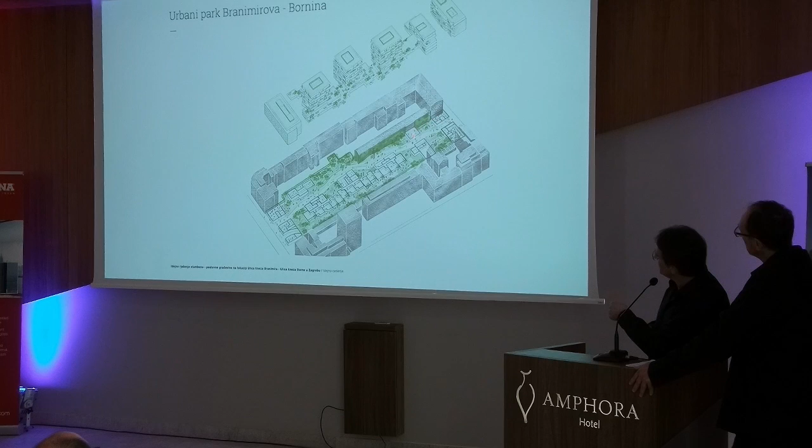I forgot to mention, this is the factory actually, which has one wing inside. So this is the narrowest part, and the sixth element, not fifth but sixth element, is one building, something like this. So most of the ground floors are public.

Cafe, hairdresser, polyclinics, and most of them are inside. And this area, not only because this is... sorry, I have...

What is important, we have an approach to the garage, and on the other side, on the west side, we provided a little height difference between the pedestrian area and this west area. As you can see, some of the elements are narrow, but some of the streets are the same size.

Of course, the green concept was important. So we had a zone of the terraces. We have vertical walls, which is actually this huge wall of 12 meters high. We have small hills, which toward the neighbors here, a little bit here, just to provide, and also an area with this.

Just to provide the possibility to plant something. You'll see a little bit later. And of course, a playground for the kids.

What's also interesting is the relationship between... I forgot to mention a very important thing, which I will show a little bit later. The client also wanted a kindergarten unit of 3 units, which was done.

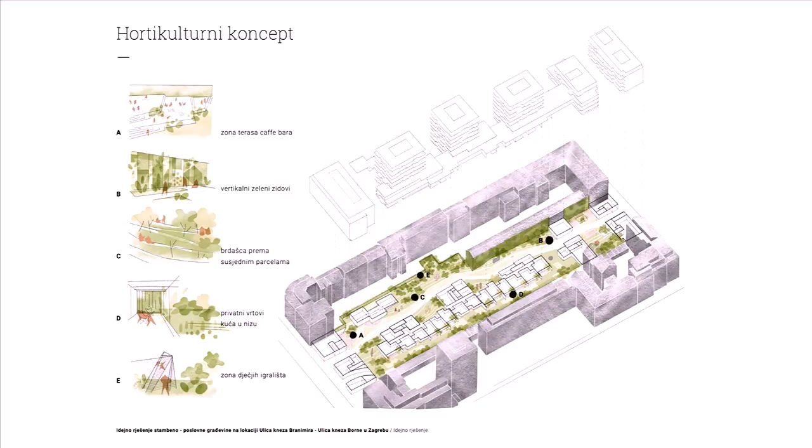We proposed that we did it as a low object, completely prefabricated wood. So this is one of the first wooden kindergartens in the country, and it's sustainable. So this is those hills and those plants. Actually, there are 36 new trees planted. You'll see the size of the trees when we come to the horticultural concept.

So yeah, this is what we lifted up the drone a few days ago, just to show those distances and the facades.

What's happening here, what we have to do is kind of a remediation of the site, of the plot. Because as you can see, the program is very large. We have like 30,000 square meters gross. We have 15,000... sorry, 40,000 volume. Yes, 40. And below we have 2 garages, and we are consuming like 90% of the plot.

Now, for the remediation, I mean, we have to bring back the green, the soil, and the ground on it. So the straightforward thing, or the easiest part, would be to just build a pavement and put some planters and whatever. But of course, the client was quite generous, so we proposed the idea of bringing a park back again, where it probably used to be before even that industry happened.

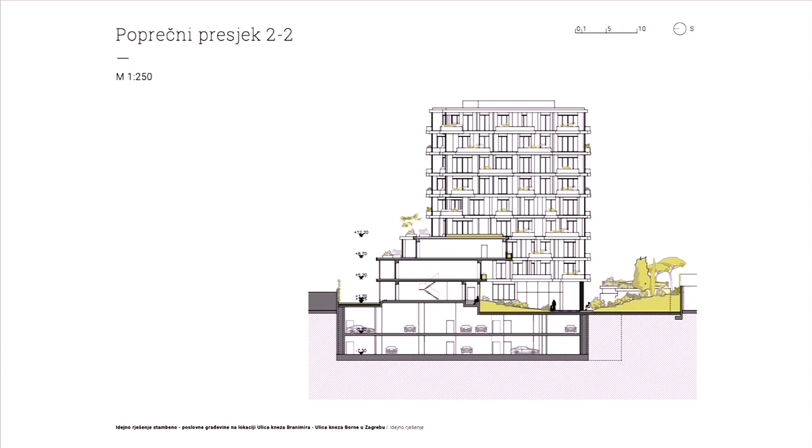So we brought back the famous townhouse, which is the two-story apartment in a row with a garden in front. So as you can see, they have their own private gardens over here. They're elevated on the east side because of the pedestrian. They're 1.8 height. From this side, they have a second story with the sleeping parts, and they have a view on the green wall above the roof of these neighboring buildings.

So the other type, here we have some images. Yes. This is a rendering, this is interior. So you see, you have your own private garden inside. It's a classical semi-detached house. Yes, double height. Okay. Like this. Now the other type is on second and third floor.

We have these roofs of those apartments below, so they have their own garden again with a green roof, because we didn't have to. We didn't want, but client accepted to sell them everything. So we bring up these patches of green on the roof. Kind of classical plan, but with very big terraces. So that was sold immediately.

Sorry. So this is the view from above of these terraces, and these green roofs over there, and with the planters. We have like 500 of those planters on the facade. We'll come to that later. So we get this kind of scenic neighborhood also with everything already green. And all this greenery is maintained by the owner, by the company that built it, the developer.

The third type is those flats from third to seventh floor, which are then oriented by the view. So this is also specific for the project. We don't have any two same apartments, because each of them was designed according to the position of the loggia and the view. And because as you can see, in Zagreb on this side, the view is better to the north, northeast, and northwest, not on the south.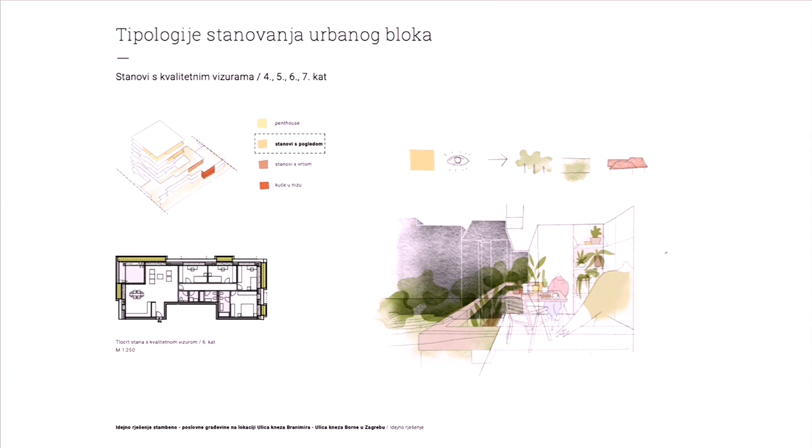So this is kind of compromising the good old rule: you have to have the living room on the south. But this is the opposite. Most of the living rooms are on either northwest or northeast because of the view, and that's of course what sells. But anyway, we even made a simulation of each floor or each loggia and the view and everything. It was really complicated. We made some point clouds. We complicated our lives too much over there. Yeah, okay. So this is one of them.

Just to mention, go back, please. Just as we showed last, for the comparison. So we did the French windows, all the way. We canceled even the parapet. We'll talk about the detail about the product. We also have this recuperation. We have a mosquito net. We have blinds. We'll talk about the windows and everything else a little bit later.

But that was the difference between the first project and the last, and planters, which are in every flat, at least in the living room and in the master bedroom. Yes, there was only one principle. If there's a single window like this one, we won't put one, because of the light. Because again, you have the same rule about the amount of light that you have to push into apartments. There's another one. The same platform. This is the seventh floor.

But this was shift. No, six. That's it. Yeah. This was shift of the verticals, so you have a view towards the mountain. That's why we pushed the buildings also. And the penthouse is penthouse. Okay, it consumes all the floor. It has the best view on all sides.

We didn't have to decide where to put the loggia. This was more like talking with the client and the future owner. And you are entering in the apartment through the... but we put a lot of planters in that apartment. So that was the rendering. Again, yes. You see, that's the view.

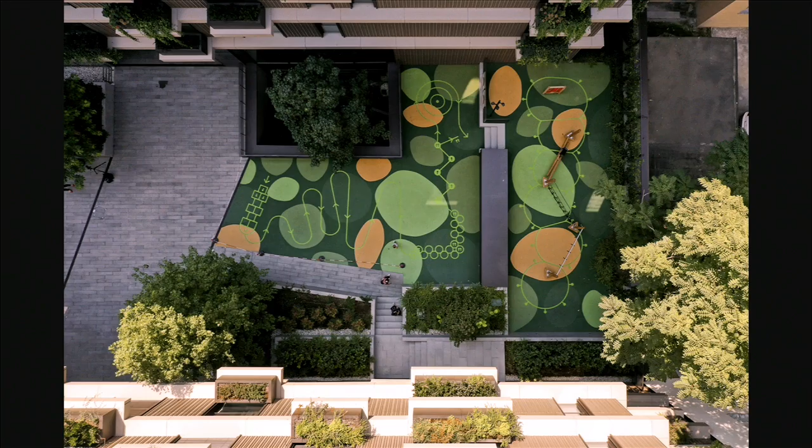Yes. We also have a playground for the children. In between, we couldn't put grass here because it will turn to mud. And also you must have this impact. It's a rubber surface. You know, stress. Yeah. And also, yeah, it's very happy.

But as you can see, these are already mature trees brought up here. Which is amazing. And this is during the construction, I mean, before the opening. When you are planning green, you never imagine that the client will bring you not only mature but huge trees. Huge trees. You'll see a little bit later. But it was important also because it makes a great logistic effort, and the green on the facade.

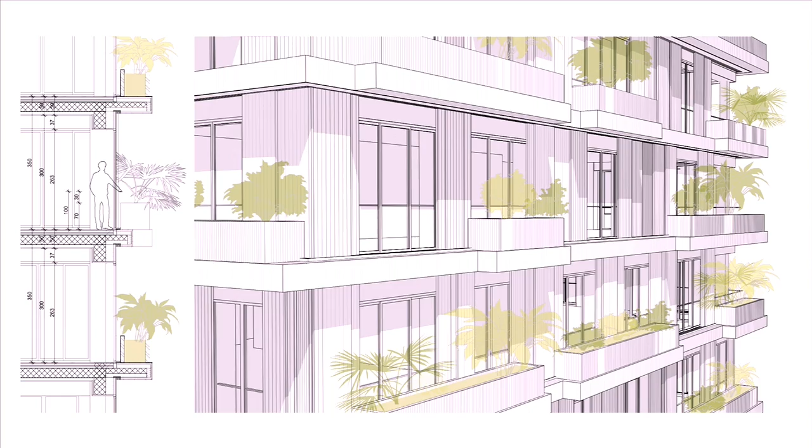Now we come to the facade at last. This is from the competition, actually. This is what we were drawing for the competition before we even got the first prize and got involved in the project. So we already provided these provisions, these planters and French openings. And the good thing in architecture is when you're coming back to the original drawing and you're just satisfied. So okay, I wasn't wrong then, because it definitely functions even now.

Now this is one of the sections, this compilation of the sections of the window. So you see these are characteristic details. This is a loggia, this is Sapa, and this is a Wicona window. Not here, because this is loggia, so you cannot have a window here. And the planter, all the things that we have to do, provide the water and even drain water and collect it, because we're bringing some sustainability here. We're collecting this water and bringing it back.

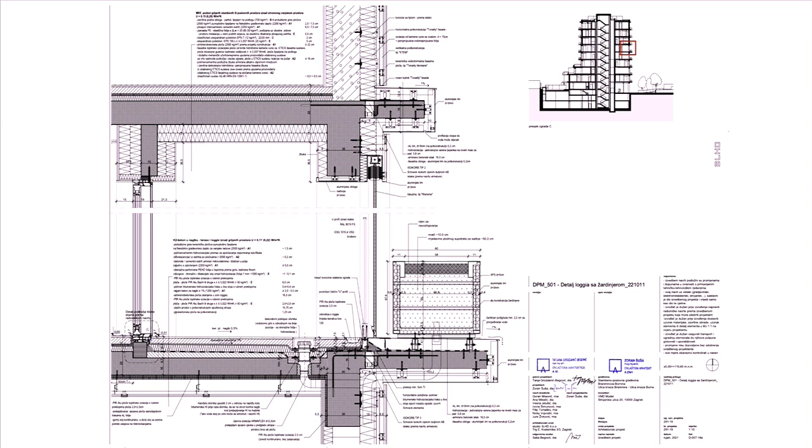And I really have to praise here present... No, we'll come to his drawing. Okay. This is a great support we had from Mario, our colleague, our friend, and Ranko was supporting him from the beginning, and we were going back and forth, and he always found a solution, whatever we came for, or maybe even more the client. Because it's a very hard client, he's also thinking and thinking.

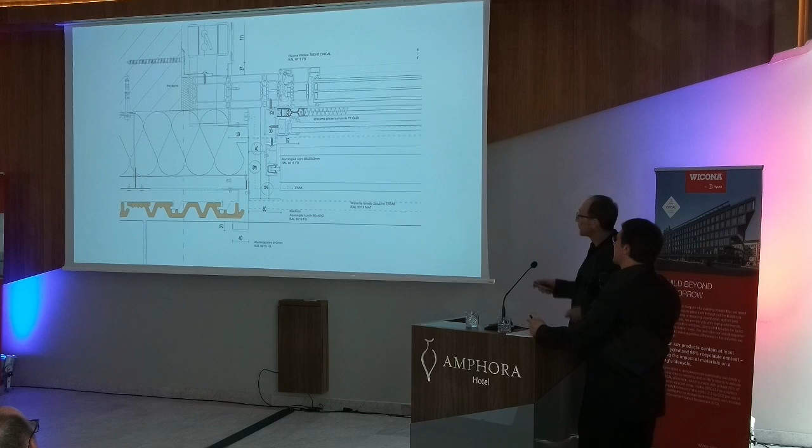He's constantly calling. How are we going to solve the blackout situation? Which is impossible when you have plants. So we had to put a little piece over here, but then where are we going to put the railing and everything? And of course, where our air is going to go inside, and how are we going to pass the blower door test. So it was really helpful, and we're looking forward to more. Next time we may be smarter and use maybe these small windows.

Of course, we have 910 windows. Windows are one part, which is maybe this big or this big. We always, of course, do a standardization. So we have one French window, the double one. We kind of came to that element, to make it as few as possible. But the idea was to develop this window, which leads quickly to the energy concept.

We used the central toplana for the heating, central plant prepared hot water coming to here. We have this ITP station, a heat exchanger with the media. So we have floor heating and air conditioning together with ventilation. So this is a level that we were expecting when we were working with this client.

But he improved it, as you remember. Pushing the level up for the quality of living, especially in Zagreb, because sadly, Zagreb is one of the most polluted cities lately, so it's recuperating. So again, we are coming back to those trees and everything that we grew. We had this data, how much one tree saves in your lifetime, how much it consumes, and processing.

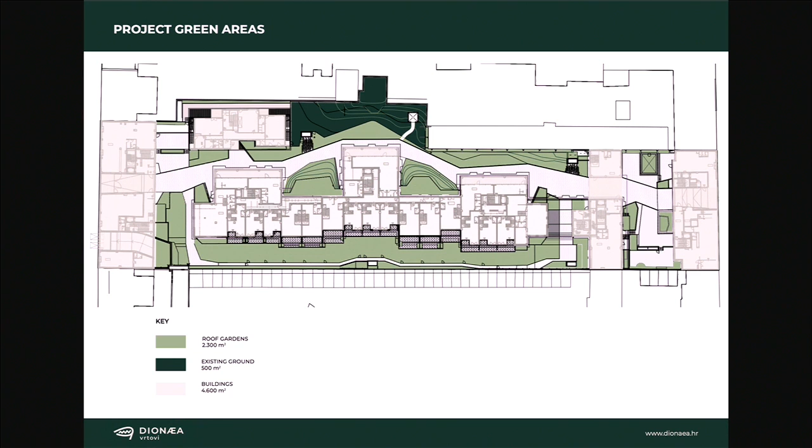You see, all the landscape concept was precisely done. We had a beautiful collaboration with our consultant for the landscape. So you see, we have these numbers here, and also 44 trees. Yes, sorry, 44 trees. 44 trees, climbers, sedums. You see how many pieces of all plants and shrubs and everything, and all is

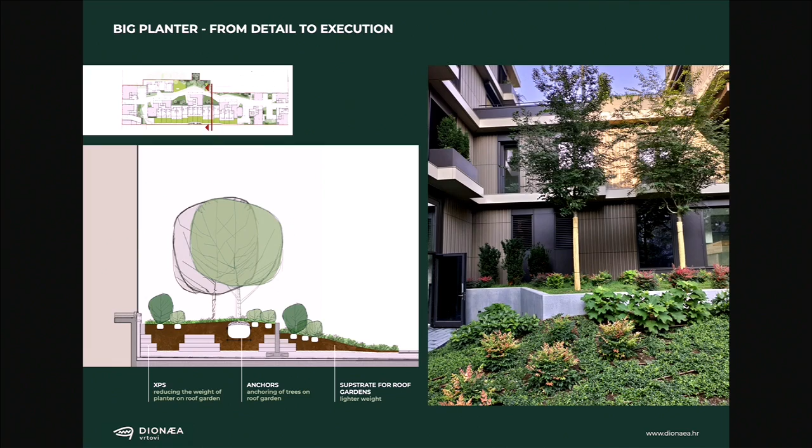water irrigated. We have a well over here, because while we were digging and doing the pit protection, we of course found water down below, so we are recycling the water too. This is a very interesting detail, how we gained these humps on the roof of the garage. We brought back soil, but we had to take care of the stress, so we brought little pieces of XPS to level it. It's not all soil, because of the weight, you know.

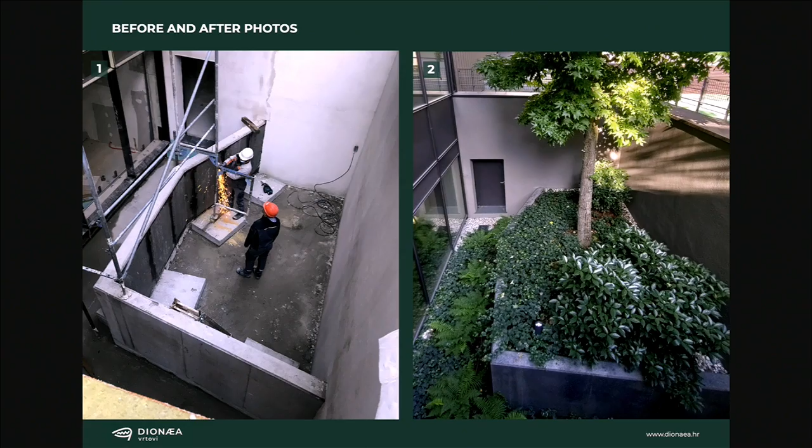So this is planting trees, the big one. As you see, this is a huge one, and there were 44 of them. Yeah, we have two sunken atriums for the gym, which is below the ground. Before and after photos. Yes.

And the kindergarten. Actually the client wanted that, but we said, why don't we do something which is prefabricated and wood, so you are also showing that this is green. So we designed it with a local company and tried a simple structural design concept, 3 units which are a little bit shifted. We imagined it first in CLT, but the problem with the CLT was that, we were doing this in March, and they said the first panel we can get in November.

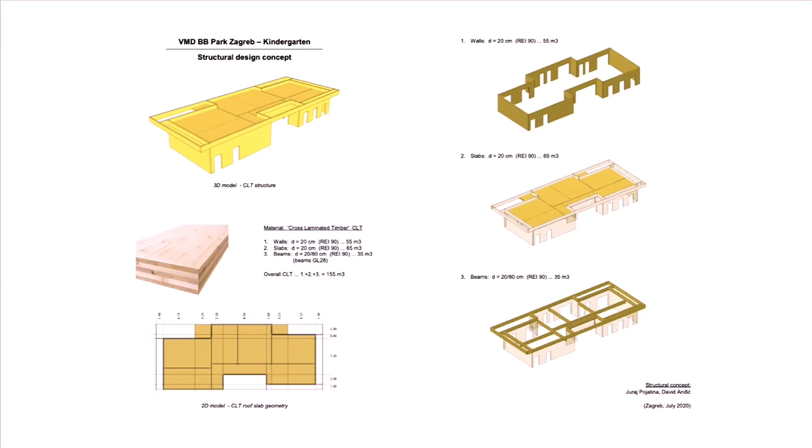Something happened on the market at that time, so in the end we did a more classical 2x4 system of panels, which is completely wood. We designed it together in about 3 months, and go. And we learned a lot about the fire protection of wood. It was assembled, 1,000 square meters in 2 days. But we were struggling a little bit because the contractor wasn't experienced with the finishing of the project. And we wanted the project, outside and inside, to have a wooden appearance and quality.

Then came what Zoran said, the problem of fire protection, because this is a public building. We have a lot of connections around, especially in Slovenia, and we contacted them, and it was stupid, but that was the regulation. This is normal cladding, but it needs to be protected from inside, and the subconstruction below painted, which was crazy, because it's a ground floor unit. That was very tough. But the result came inside, also wooden panels and everything. The appearance is wooden. As you can see, we are learning little by little to build sustainably.

So those were moments which came as additions to the project, and that's it. I'm sorry, a little bit over the time. And thank you.